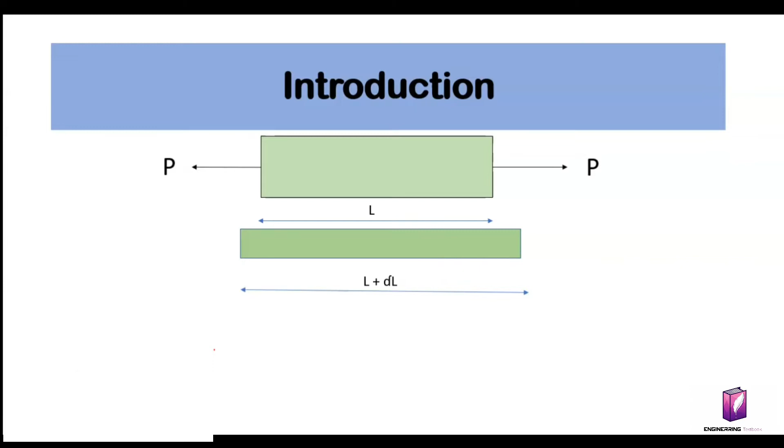So what is deformation? Deformation is change in length or breadth or diameter or thickness, anything. That is, deformation is change in dimension of any body. So why does this deformation occur? This occurs due to the load or force we apply to the body.

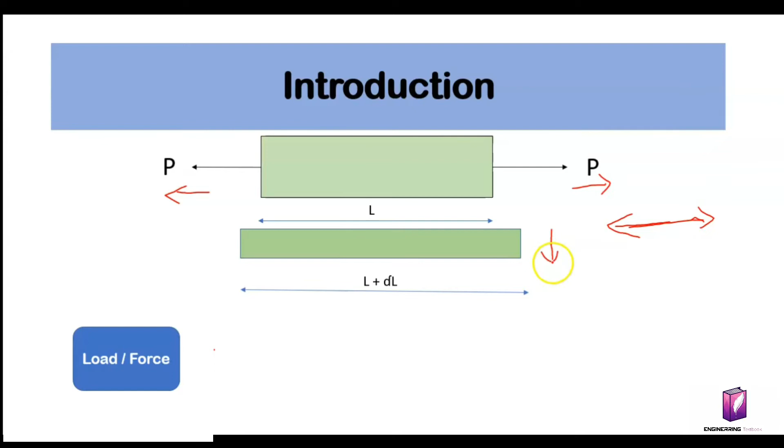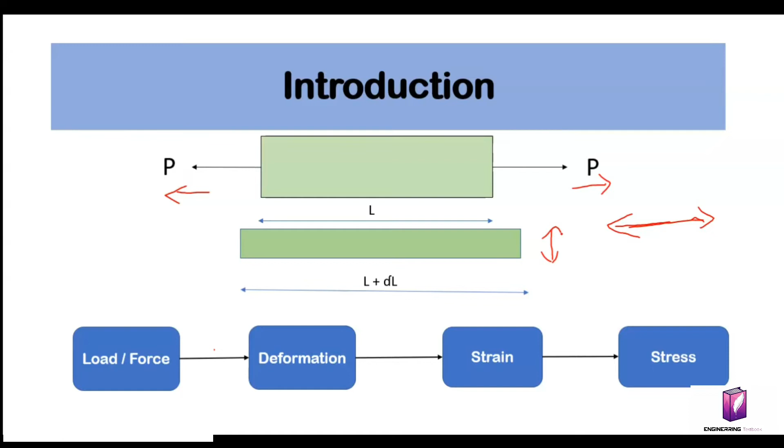In this example, we applied force P in the outward direction at both ends. So the direction is outward, and the rod will elongate in the horizontal direction. That is why the length is increasing and the diameter is decreasing. This is because of deformation. Due to deformation, stress and strain are generated in the body. Let's see in detail further.

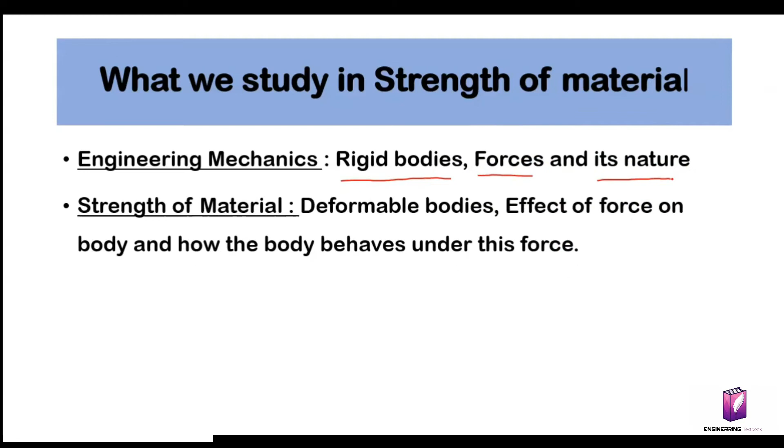What we will study in strength of material. In engineering mechanics, we have studied about rigid bodies, forces and their nature. In strength of material, we will study about deformable bodies, the bodies which deform, the effect of forces on them, and how the body behaves under these forces. So strength of material is also known as mechanics of solids and structural mechanics.

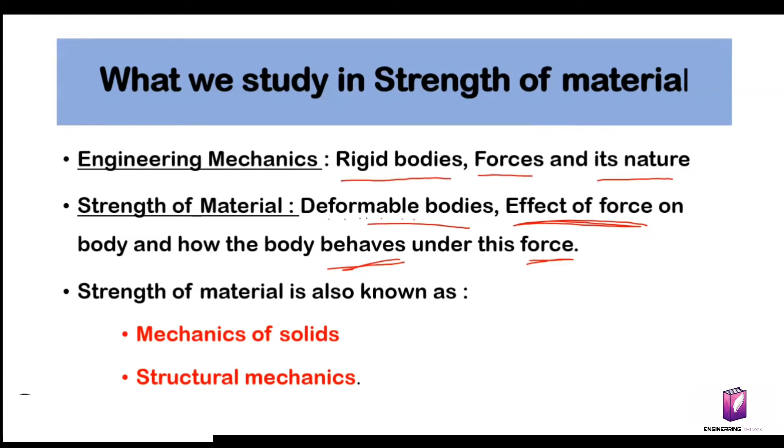Rigid bodies and deformable bodies. Rigid bodies: there is no deformation of a body under the action of load to which they are subjected. So in a rigid body, if we apply any load or force to it, there will be no change in its dimensions, that is, no change in its length, width, diameter, etc. That is, no deformation in it.

No body is perfectly rigid. In the whole world, there is no such body that is perfectly rigid. Every body deforms slightly under the action of force. The rigid body is an imaginary or theoretical concept. Since no body is perfectly rigid, every body in the whole universe deforms slightly after application of force. So the rigid body is an imaginary concept.

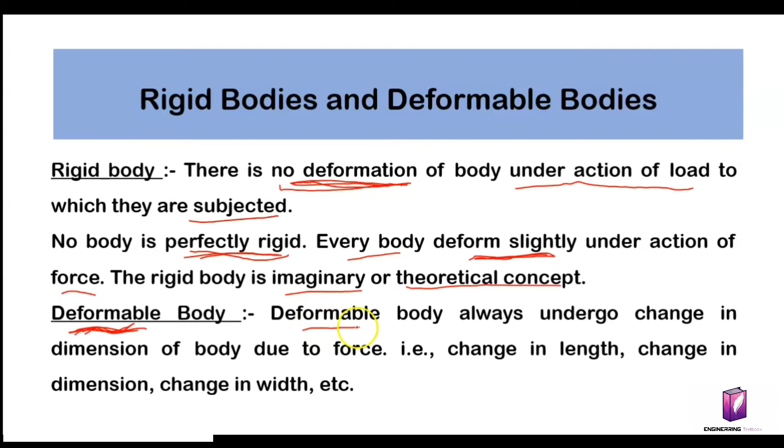Deformable body. As the name suggests, deformable. So the body which deforms, that is, the body which changes its size and shape, is a deformable body. So let's see the definition of it. A deformable body always undergoes change in dimension due to application of force, that is, change in length, change in width, etc.

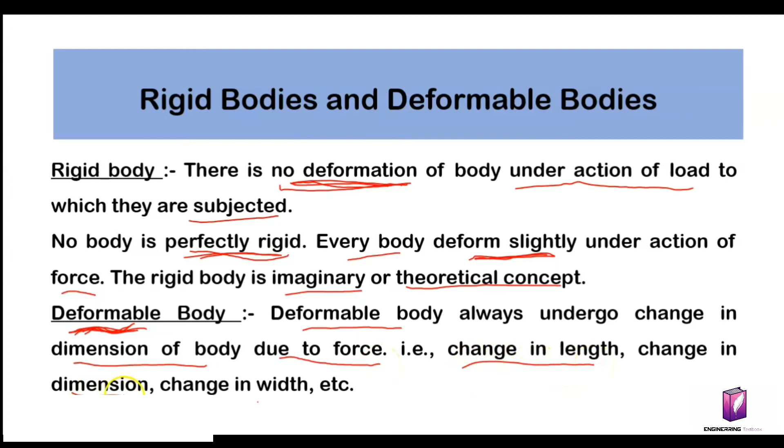Let's see some examples of rigid and deformable bodies. Take a spring with no mass or weight attached to it. If we apply a weight to it, it will get elongated slightly. If we apply more weight to it, it will get elongated more. So this elongation is deformation, and this change in position of the weight is displacement.

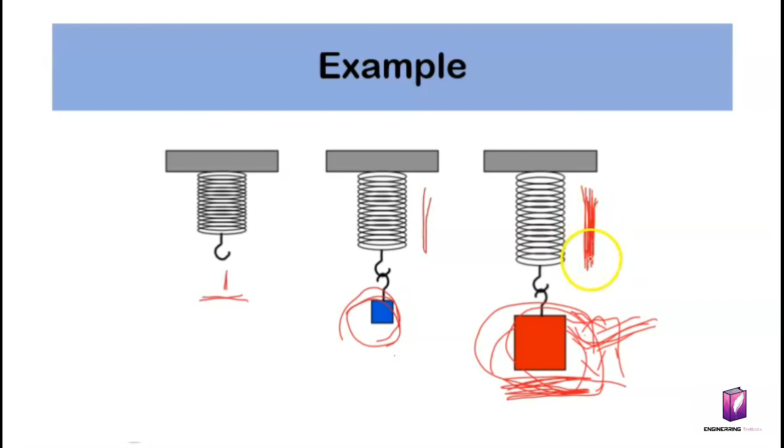That is, in this example, the weight is a rigid body because the weight is not changing its size and shape, but the spring is not a rigid body, it is a deformable body because it is changing its dimension. So if the force, that is the weight, is more, the deformation of the spring will be more. If the weight is less, the deformation of the spring will be less.

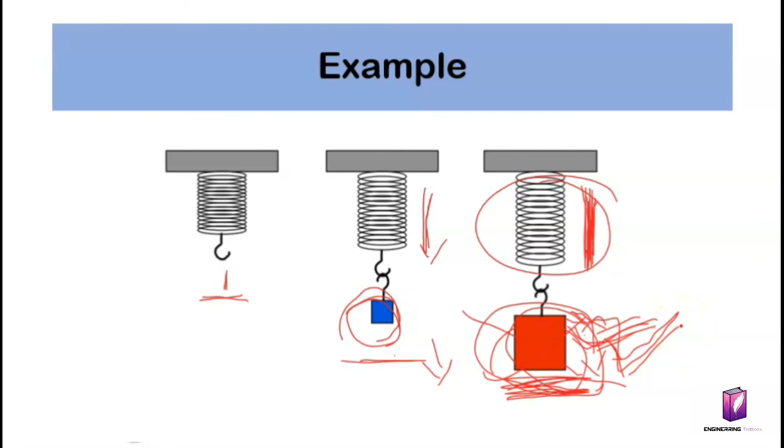So in strength of material, we will study about the deformation of a body. That is, in this example, we will study about the spring, not the weight, because we have already studied about the rigid body in engineering mechanics. So in strength of material, we will study about deformable bodies.